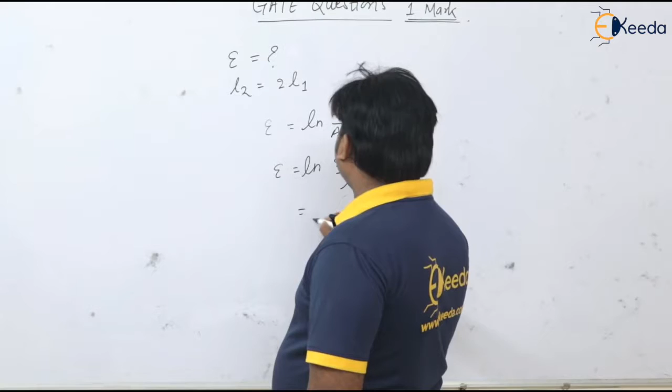True strain equals ln of final length over original length. Since the length is doubled, final length will be 2 times L original divided by L original. So ln of 2 is how much? That is the answer: ln of 2 is 0.693. So this is the true strain.

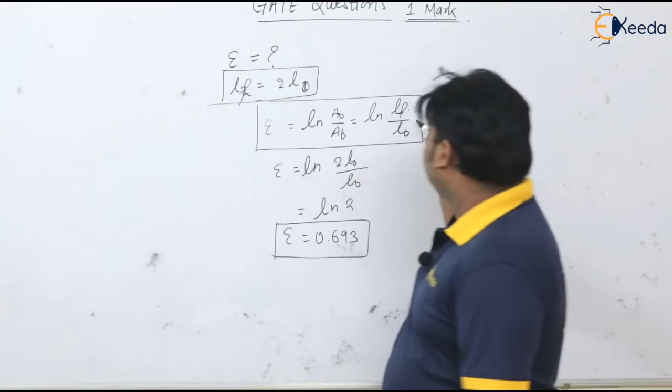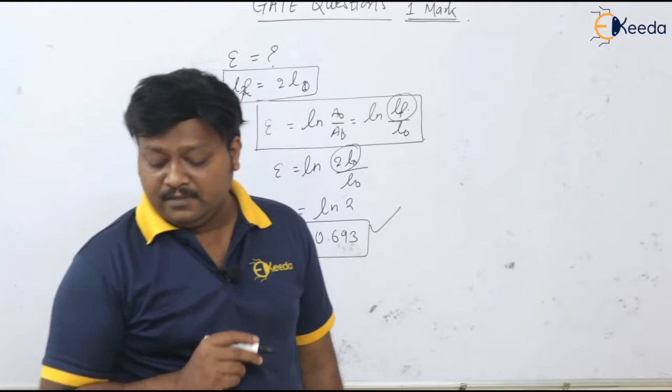We know true strain is the natural log of original area divided by final area, or natural log of final length divided by original length. Here L final becomes 2 times L original. Putting these values, we get the answer 0.693. The options given are 0.307, 0.5, 0.693 and 1. So 0.693 is the correct option.

Next question: hot rolling of mild steel is carried out. Option A, at the recrystallization temperature; between 100 and 150 degrees centigrade; below recrystallization temperature; or above recrystallization temperature. Of course, the word hot rolling, that is hot working, means we are working the material above its recrystallization temperature. So option D is correct: above the recrystallization temperature.

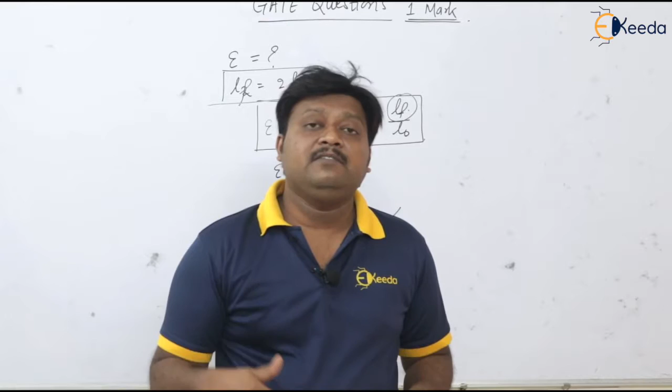Next: the ductility of the material with work hardening. Options: A increases, B decreases, C remains same, D unpredictable. We know that during work hardening, the material becomes hard and its strength increases. So when hardness increases, ductility comes down.

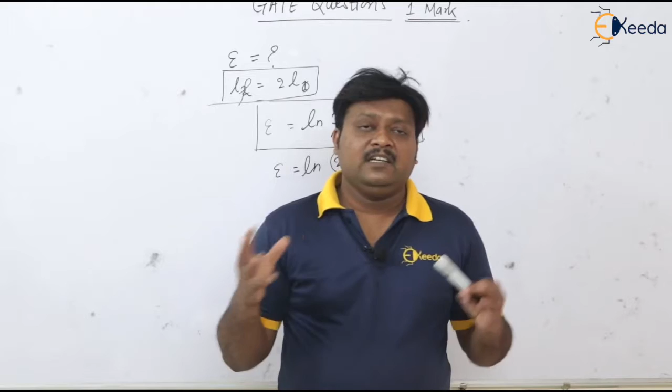When strain hardening occurs with increasing percentage of cold working on the material—since work hardening is observed only in cold working—as we increase the percentage of cold work, strength and hardness of the material go on increasing, while ductility comes down. So the ductility of the material with work hardening decreases. Option B is correct.

Next question: the cold working of steel is defined as what? Whenever we work the material below its recrystallization temperature, that is cold working. Options: A, at its recrystallization temperature; B, above its recrystallization temperature; C, below its recrystallization temperature; D, at 2/3 of the melting temperature of the metal.

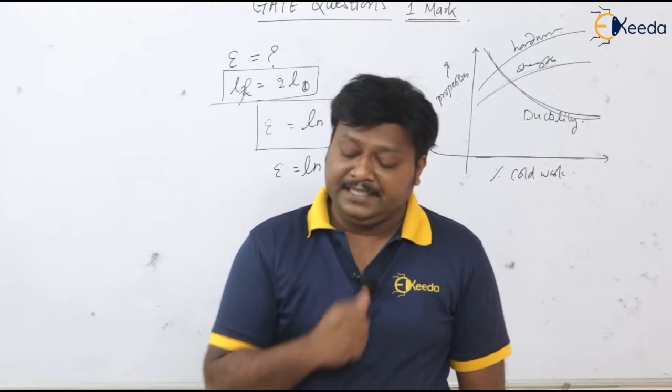In terms of formula, the recrystallization temperature is about 1/3 or half of the melting point temperature. Cold working of steel means the material is worked below its recrystallization temperature. So option C is correct here. I hope you are getting what I am saying.

Next question: the maximum possible draft in the cold rolling of the sheet increases with—so they are asking for the maximum possible draft in the rolling operation. We will see how to determine this maximum possible draft.

The maximum possible draft in cold working of sheet increases with what? We know that delta H max, the maximum possible draft, is equal to mu squared times the radius of roll. So how can we increase this? We can increase the coefficient of friction or the roller radius, and it goes on increasing.

Let us see the options. Option A, increase in coefficient of friction - yes, that is correct. Option B, decrease in coefficient of friction - no, if you decrease it, the draft will also decrease. So that is not correct.

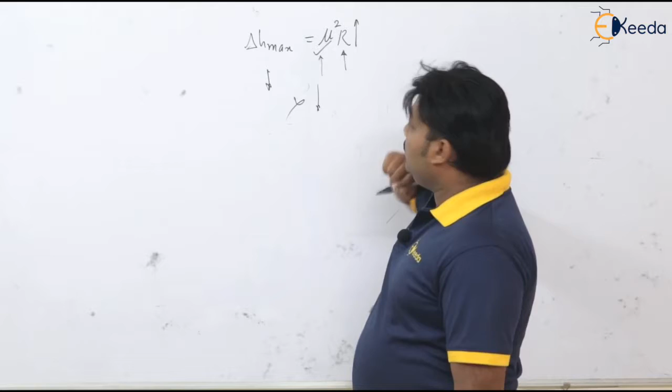Option C, decrease in roll radius - no, it increases with increasing roll radius, so option C is also not correct. And increase in roll velocity is independent, as you can see here. So option A is correct: the maximum possible reduction or draft in sheet rolling operation can be increased by increasing the coefficient of friction.

Next question: collapsible tubes are made by option A, drawing; option B, spinning; option C, extrusion; or option D, rolling. In drawing operation we are making wires from the solid rod, and there is no mandrel generally used for producing collapsible tubes.

Spinning is simply holding the given sheet onto the spinning block - that shape is going to come onto the sheet. We keep this sheet against the spinning block, that is the spinning operation we know. So there are no chances of getting a collapsible tube from this.

Extrusion - yes, by using the impact extrusion technique we get seamless or collapsible tubes. For rolling, if there is tube piercing or tube rolling, we can get the seamless tube, but the name of that process is tube piercing. After getting the seamless tube by tube piercing, we again send it to plug milling to get exact sizing of the produced tube.

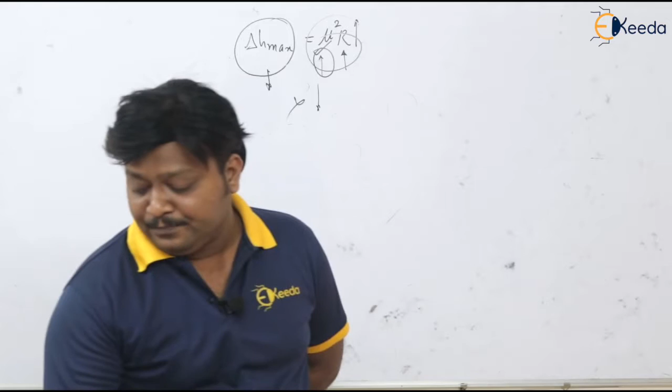Now the next question, dear students. I hope you are getting this. These are previous years production and mechanical engineering questions. We have discussed all the things in much detail or required detail, so no need to worry.

So the next question is from PI paper. Which one of the following manufacturing processes requires the provision of gutters?

Already discussed - when we are doing the closed die forging operation, to ensure material reaches each and every die corner, for that reason we take the volume of raw material more than the volume of the final product, up to 10 to 15% more volume.

And where to accommodate the extra material into the die? For that reason, we have provided gutters in the die, so material flows to each and every corner, and leftover material accommodates into the gutters and comes out as flash with the main product, which we remove by trimming operation. So I hope you get the answer.

What will be the answer to this? Which one of the following manufacturing processes requires the provision of gutters? Option A, closed die forging. Option B, centrifugal casting. Option C, investment casting. And option D, impact extrusion.

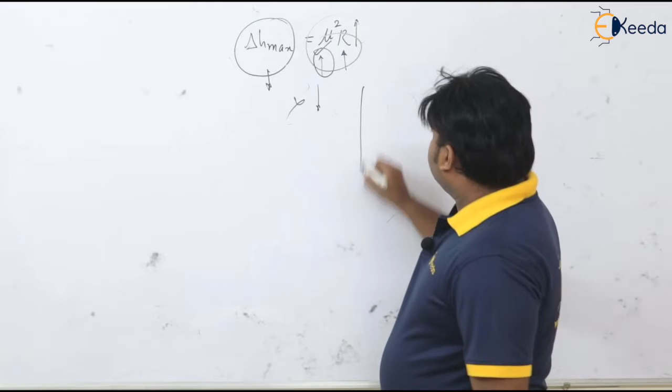Suppose this is a die and we are forging, and the material is not going properly at these corners. So after going at the corner, they are overlapping, having some fold like this at the corner. So they remain with a cavity or some crack - this folding over the part, some weak joint, or some folding we can have on the forged part. That is nothing but the lap.

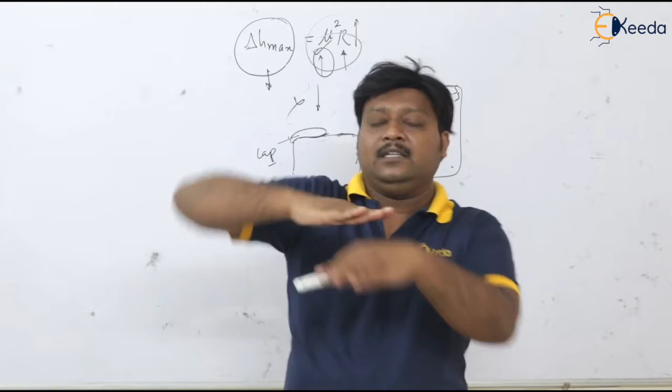Please remember this. Generally cold shut is simply the cracks at the corners, because of very sharp or very small corner radii, or because of improper design - that is the result, this is a cold shut. But sometimes material cannot flow into the die properly, so it gets overlapped on the remaining forged part, producing the lap-like structure, a weak joint structure. So this is called the lap in forging.

So here it is written in bracket lap, cold shut, and what is written here - cold shut in bracket lap. So of course this is not the defect in casting, but this is the defect in forging.

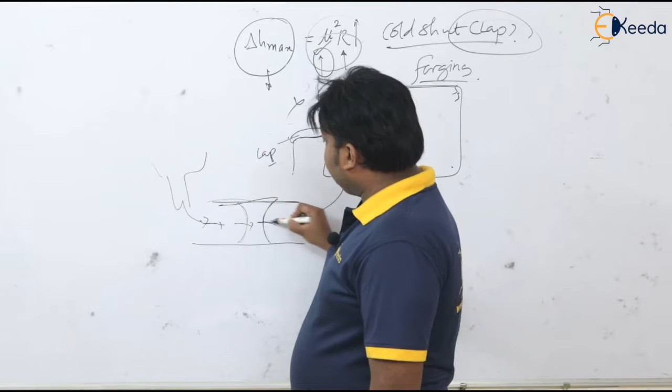In casting, what happens - the molten metal stream is coming from one place, and another molten metal stream is coming from another place. These two streams of molten metal are unable to fuse. This is the mold cavity - these two streams of hot material are not fused properly to become one material, so it produces this cavity. This is the cold shut.

So when they say lap, it is 110% the defect of forging. So what was the question?

Cold shut, in bracket lap, may occur in the products obtained by casting, forging, machining, welding. Machining and welding are not 100% it - so there is a doubt between casting and forging. I hope this doubt is now cleared. So forging is the correct answer.

Next question: Flash and gutters are provided in the drop forging dies at the following stages.

Flash and gutter are provided in the following stages: blocking, preforming (that is edgering), finishing, or fullering. The flash is only generated when the component is made, and at the last stage, that is the finishing stage, the flash is going to generate.

That is, the finishing operation is always carried out in the closed die forging operation. Please remember, we have discussed this. Fullering is an operation done onto the anvil using the top and bottom fuller.

Edgering also similar, we are collecting the materials at the ends of the given rod. And blocking is the approximate shape we are going to produce, but the final shape is always produced in the finishing operation.

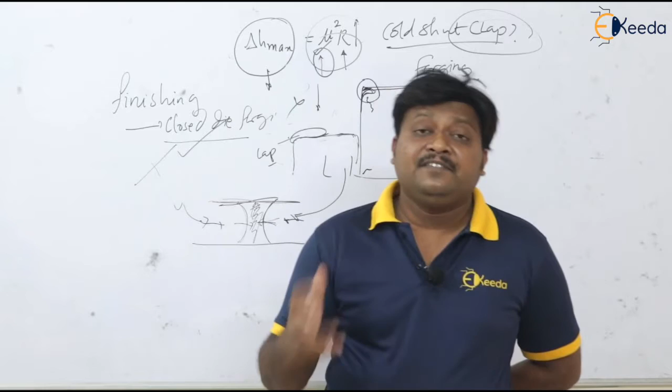So because of the scale formation, please remember what are the sources of defects in the rolling operation: inclusions, the scale formations onto the slabs that we have taken for the rolling operation. Please remember.

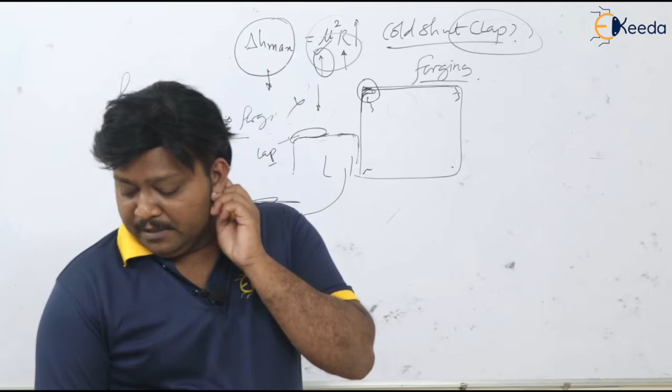Next question: a solid cylinder of diameter 100 mm and height 50 mm is forged between two frictionless flat dies to a height of 25 millimeter. Find the percentage change in the diameter. Okay, let us solve this.

What is the question? A solid cylinder of diameter 100 mm and height 50 mm, it is forged between two flat dies. These are two flat dies. Diameter was 100 mm and height was 50 mm.

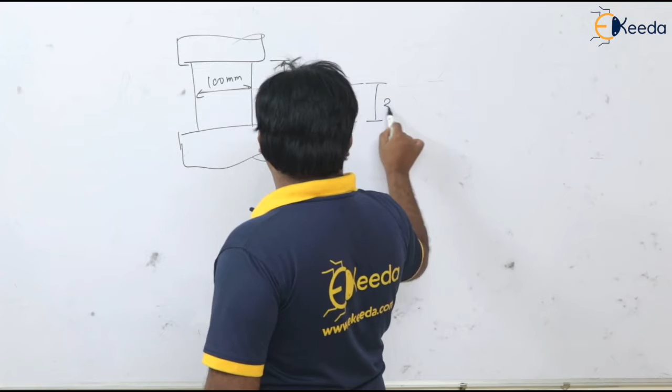Up to which height is it forged? The final height, it is forged up to 25 millimeter height. And what they are asking is percentage change in diameter. This is the final diameter, not given, we will calculate. So initial diameter 100 millimeter, final diameter not known, we will find out. Original height 50 mm and final height 25 millimeter.

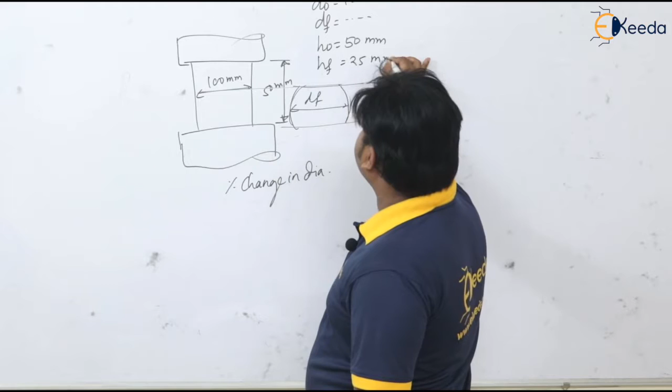We know that the volume constancy principle is valid for forging, so we can write d-original squared into H-original equals d-final squared into H-final. So D-final will be d-original into root of H-original by H-final. D-original was 100 into root of H-original 50 by H-final 25, so 100 root 2 millimeter is the final diameter, isn't it?

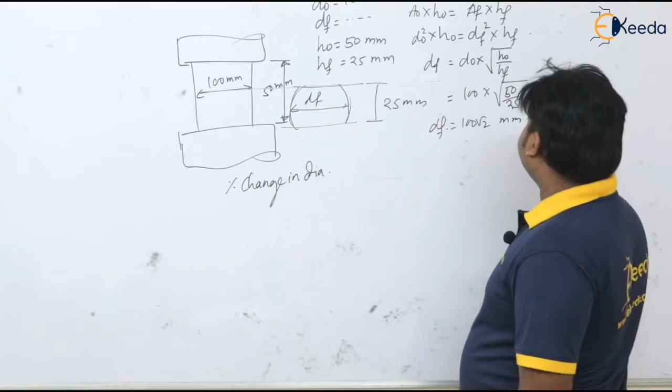So let us have the value here. How much is 100 into root 2? It is 141.42 millimeter. Okay, so what is the percentage change? Options are 0, 2.07, 20.7 and 41.4.

So very easily we can say 100 mm became how much? 141.42. So how much change have we got in the diameter? It is 41.4%, very nicely. So if this is the final, D-original was 100, D-final is 141.42. So what is the percentage change?

That is D-final minus D-original divided by D-original, isn't it? That is 141.42 minus 100 divided by original 100 into 100. So how much? It is 41.42%. So percentage change we got here is 41.4%.

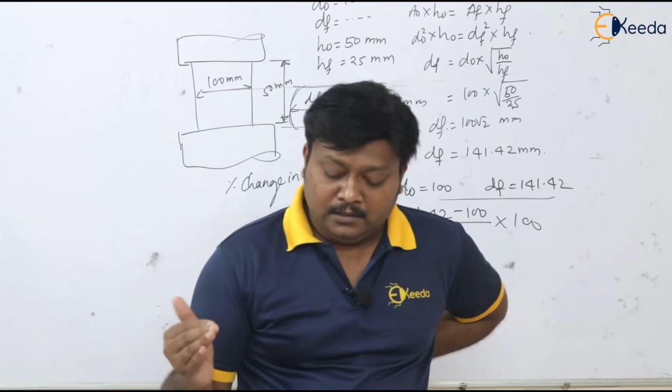Next question that we are going to see here: in group A, some defects and some products are given, and in group B, the name of the defect and other things are given. Let me write the match the pair here so that we can solve it very nicely. So group A, what is given?

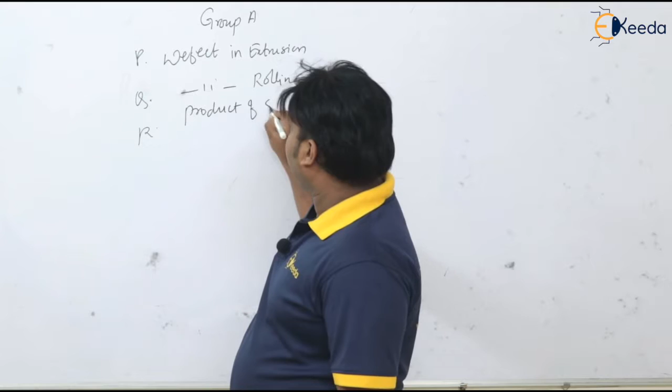So, defect in extrusion is P. Q is defect in rolling. R is product of skew rolling, and S is cluster mill, product of rolling through cluster mill.

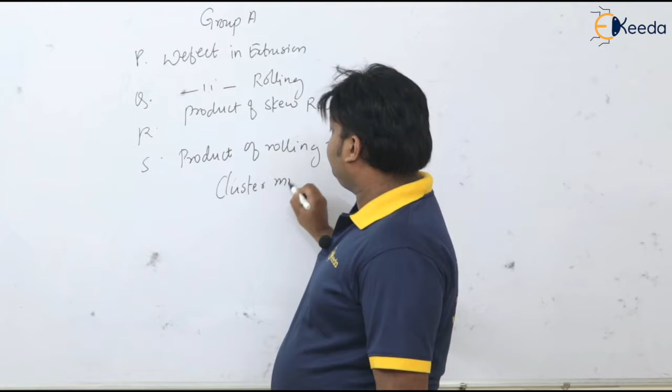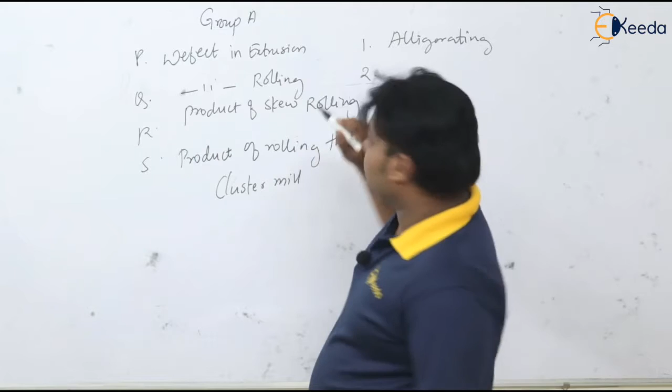So here, number one is given as alligatoring, second is scab, third is seamless tube, fourth is thin sheet with tight tolerance, and fifth is the semi-finished ball.

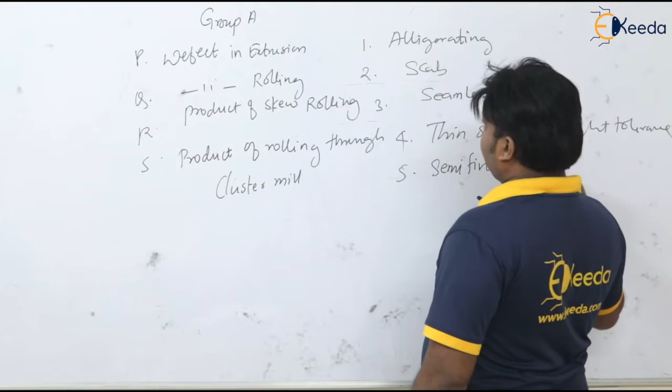Of ball bearing. Okay.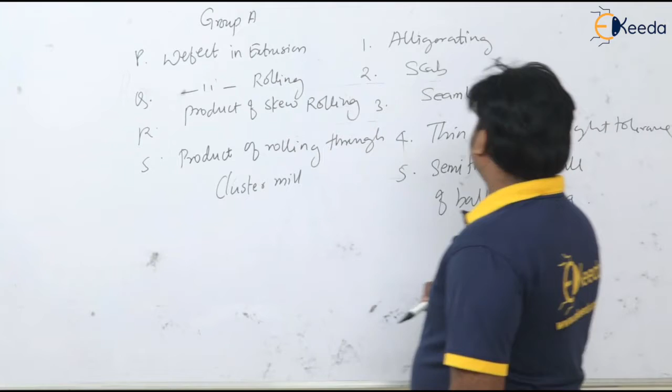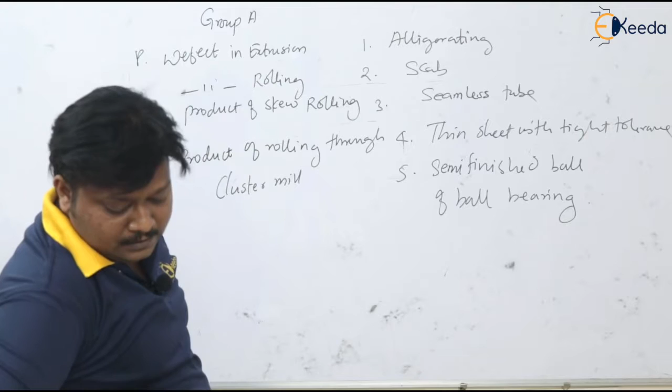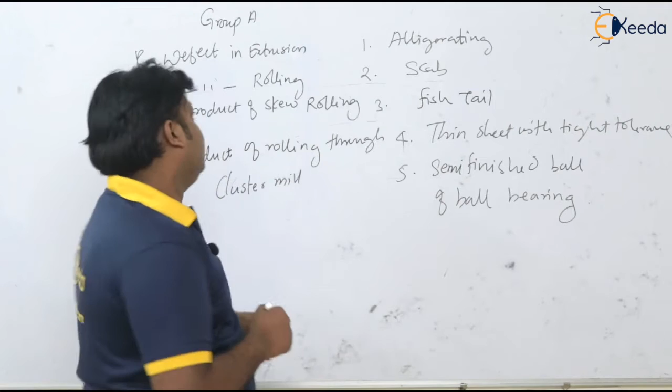So see here, what is given? Defect in extrusion, defect in rolling. So third is not seamless, it is a fish tail. So we know that the defect in extrusion we discussed is fish tail. Defect in extrusion is P3. We know the defect in rolling, that is crocodile crack or alligatoring, that is Q2.

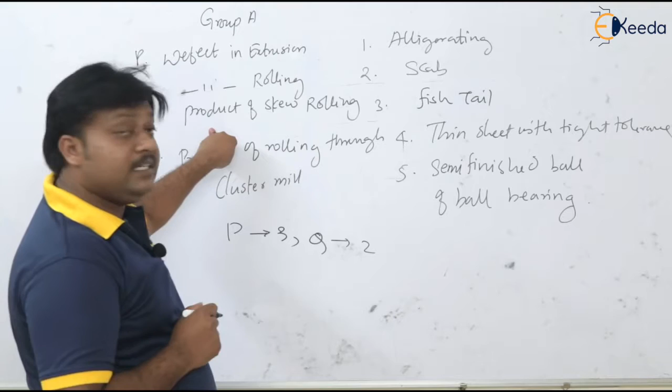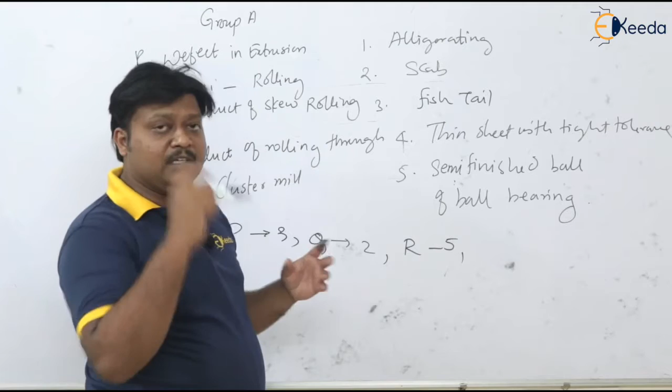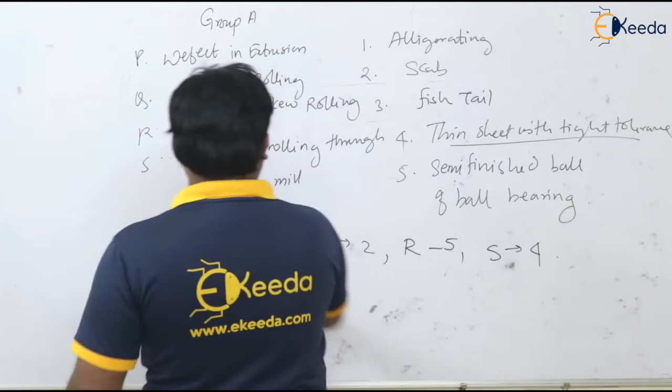We know the product of skew rolling is what? We have seen in the special rolling process that skew rolling is used for making large size balls, semi-finished balls, which are usually in large size ball bearings used in the cement industries. So the product of skewed rolling is R5. And in cluster mills, more than one backup rolls are used to have thin sheets with tight tolerances, so this is S4. This is the correct match we can have here. We have discussed it, it's very simple.

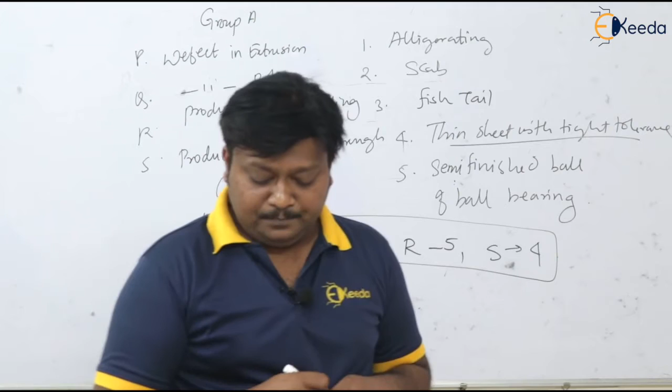And the last question we are going to see is a 1 mark question, again very simple. I hope you can solve this. In rolling process, the maximum possible draft, defined as the difference between the initial and final thickness of the sheet metal, mainly depends on which pair of the following parameters.

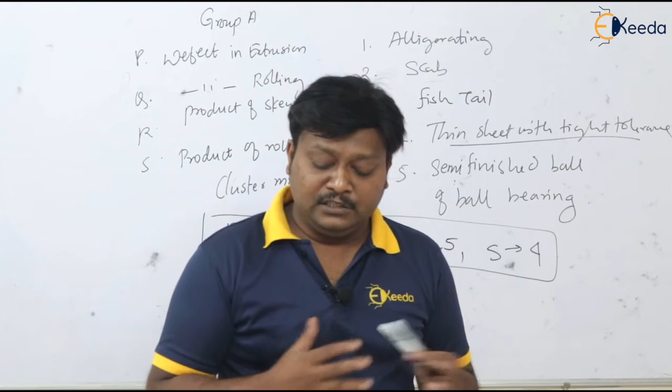So P, Q, R, S, T are the things given. P is given as strain, Q is given as strength of the work material, R is given as the roll diameter, S is given as roll velocity, and T is given as coefficient of friction between the roll and the work.

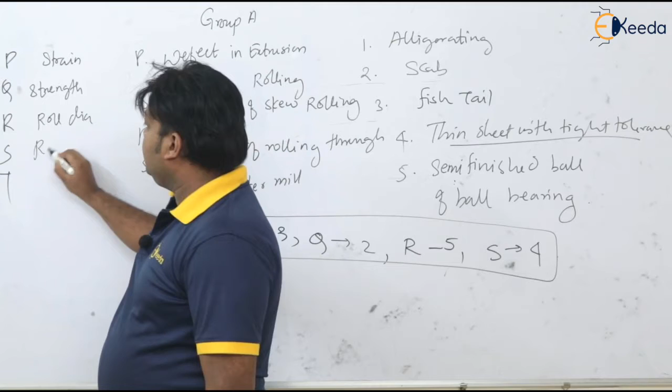Okay, so which parameters are given? P, Q, R, S, T. What all is given? Strain is given, then strength of work material is given, then roll diameter given, then roll velocity is given, and finally the coefficient of friction between the roll and the work is given.

So we know that delta H max is mu square times R, where mu is the coefficient of friction and R is the roller radius, which can be diameter by 2. So the pair is correct — roll diameter is correct and the coefficient of friction is correct. So what is the answer? R and T. The options given are Q,S, R,T, S,T and P,R. So RT is correct — roller diameter and coefficient of friction. From this formula it is very clear.

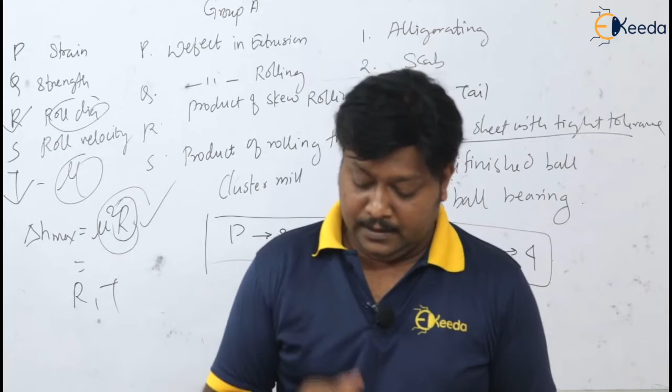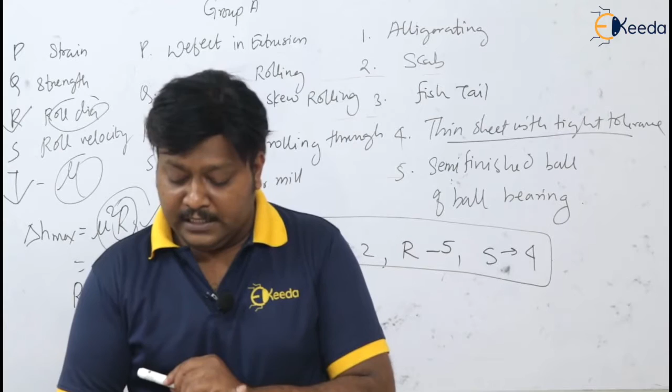Okay, next question we are having in this 1 mark question. See, the true stress at fracture of a tensile tested specimen having an initial diameter of 13 millimeter is 700 megapascal.

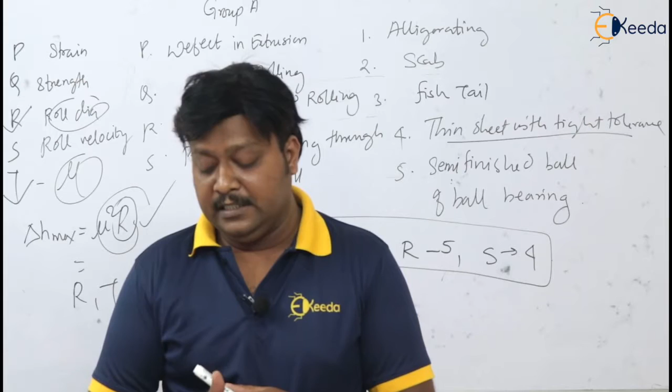If the diameter of the specimen at fracture is 10 millimeter, then the engineering stress in megapascal at the fracture is. I hope you are getting the question. I will repeat the question. What is the question? Once again I am reading.

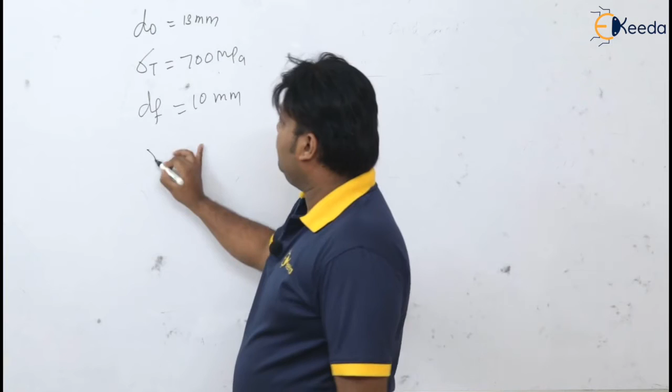The true stress at fracture of a tensile tested specimen having an initial diameter D-original of 13 millimeter, and the true stress sigma-T is given as 700 megapascal. If the diameter of the specimen at fracture, D-final or D-instantaneous at fracture, is 10 mm, then what they are asking is the engineering stress, that is sigma-n or nominal stress.

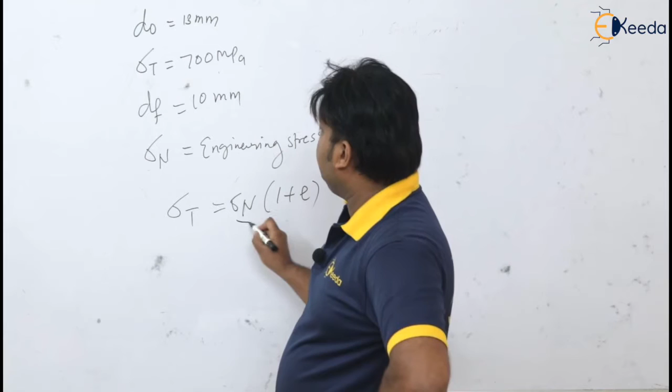So you know what sigma-T is — we have seen from the relation between true stress and engineering stress, that sigma-T is equal to sigma-n into bracket 1 plus E, isn't it? So sigma-T is known to you, only the thing is that E is not with you, that is the normal strain is not with you.

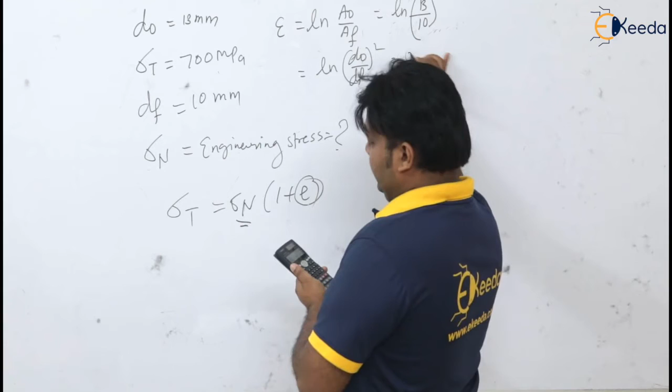So let us calculate. We are having the true strain. How to calculate true strain? That is ln of A-original by A-final, isn't it? So here ln of D-original by D-final, bracket square, because area is pi by 4 D-square. So it can be ln of original diameter 13 millimeter, final diameter 10, whole square. So ln of 1.3, or 2 times ln of 1.3, that is 0.524.

0.524 — this is your true strain, okay. And we know how to calculate this normal strain, that epsilon is equal to ln of 1 plus E. We know the relation between true strain and normal strain, isn't it? So true strain is 0.524, equal to ln of 1 plus E.

So what I have to do? E to the power 0.524 minus 1, isn't it, is equal to E — that E is for exponential and this E is for strain, don't confuse. So shift — answer is 1.69. So 1.69 minus 1 is equal to E. So how much is it? 0.69. So you got here the strain, and you know the true stress given as 700 megapascal — put the values here.

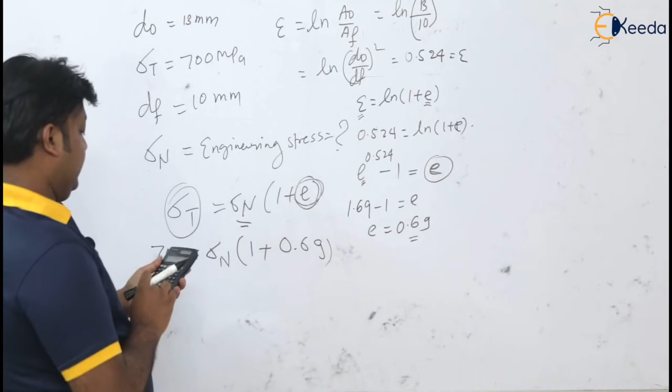So 700 is equal to sigma-n, which we are going to find out, into bracket 1 plus E, which is 0.69. So 700 divided by that answer, it is 414.2. So sigma-n is that much.

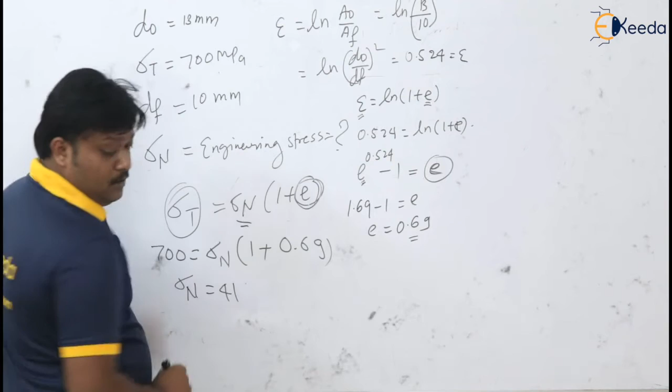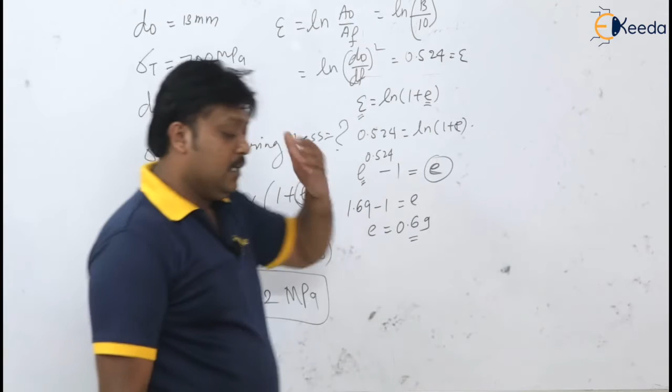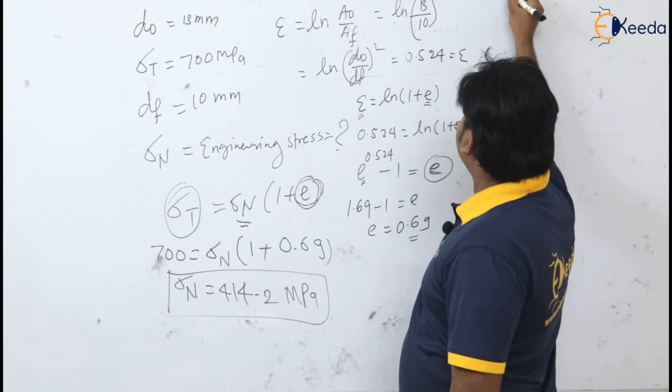So very easy, we know the relationship between normal stress and engineering stress, they are the same. But the relation between true stress and normal stress, that is engineering stress sigma n, is equal to sigma T is equal to sigma into bracket 1 plus E. And the relation between normal strain and true strain is epsilon, the true strain, is equal to ln of 1 plus E, which is the engineering or normal strain. This is the true strain. So by using this relationship we can easily calculate sigma n in this question.

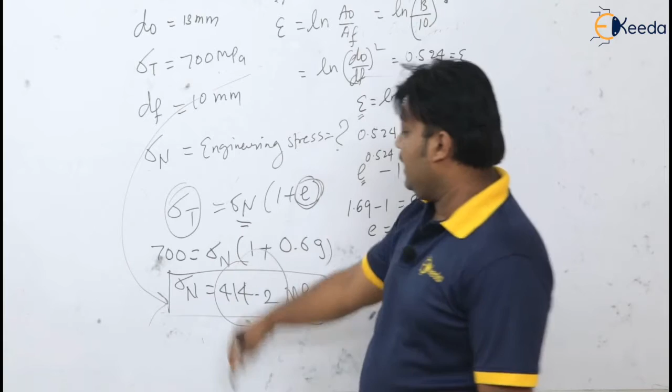So what answer did we get? 414.2 megapascal will be the engineering stress, okay. This question was from PI paper 2015. Here we have to write the answer, options are not given. So 414.2 is the correct answer, I think so.

And it is correct. So next question, listen carefully. Again from PI 2015, PI means Production Industrial Engineering, GATE paper 2015. I will read the question.

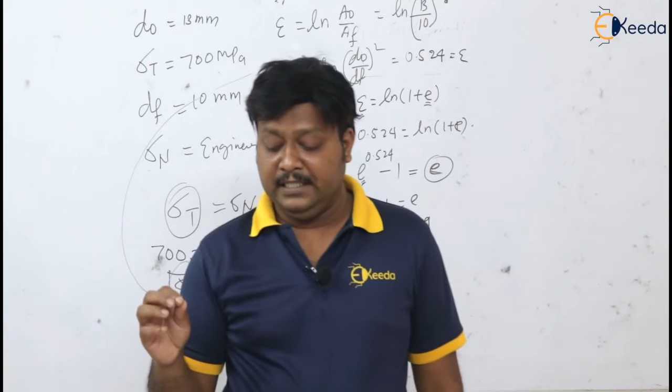In rolling of flat strip, what they are saying is about the relative velocity of the strip with respect to the roller. We know about the rolling operation, we have seen the relationship for linear velocities and for the pressure. Now they are asking for the relative velocity of the strip with respect to roller. The strip with respect to roller, we are going to see.

What are the options? Option A: positive at entry plane, negative at exit. Option B: negative at entry plane, positive at exit. Option C: positive throughout from entry to exit plane. Option D: negative throughout from entry to exit plane.

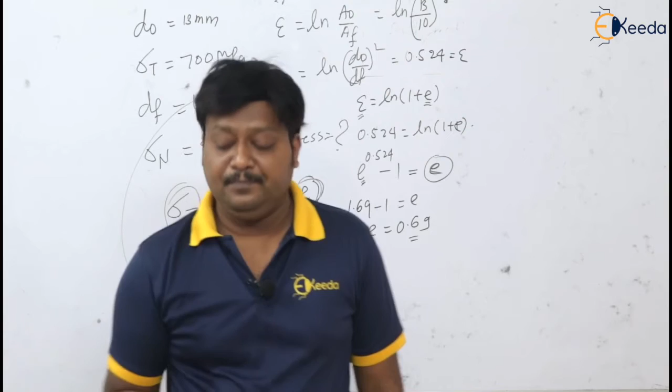We already discussed this, but once again I am going to discuss the relative velocity in the rolling operation. The very important thing is that the velocity of strip at the entry is less than the velocity of roller, which is less than the velocity of strip at exit. We know this, this is the roller rotating with constant RPM.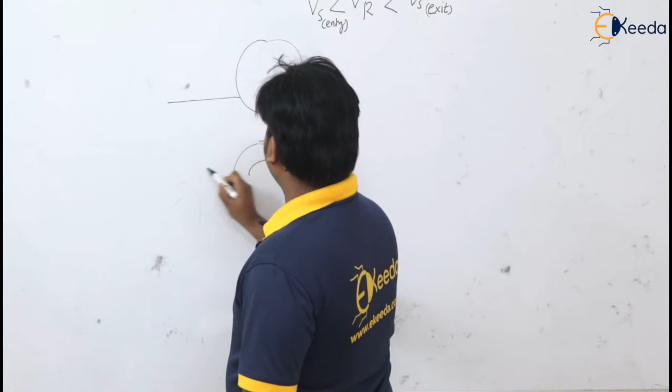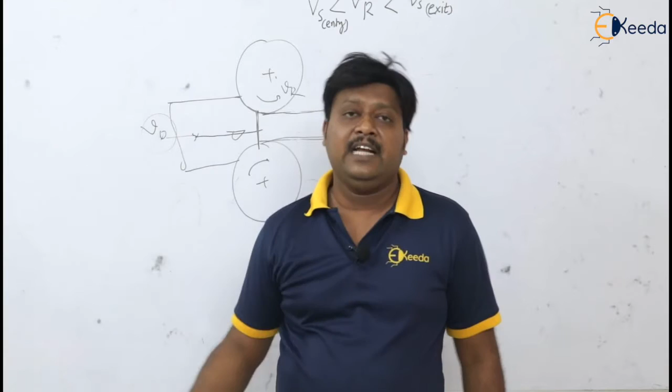Always this is the strip at exit and this is the strip at entry. So we know that the initial velocity of this strip, I am writing V original here, and this is V final, and say this is the velocity of roller VR. So what happens first: this strip velocity at the inlet is very less compared to the velocity of roller. Now once the strip moves into these rollers, the velocity goes on increasing, and at some point in the deformation zone it becomes equal to the velocity of roller, that we know is the neutral point, and after passing the neutral point the velocity of strip again goes on increasing and becomes maximum at the exit.

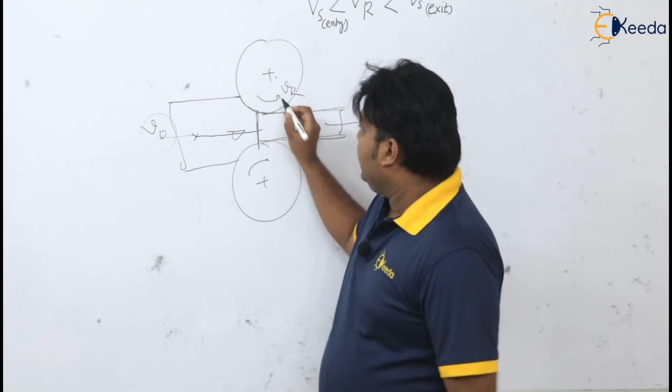But throughout this, the roller velocity remains the same. So we can say initially the roller velocity is greater than the strip velocity, and at the exit the roller velocity is less than the velocity of the plate, isn't it? So if I consider the roller velocity with respect to strip velocity at the entry plane, please remember, it will be a huge positive relative velocity.

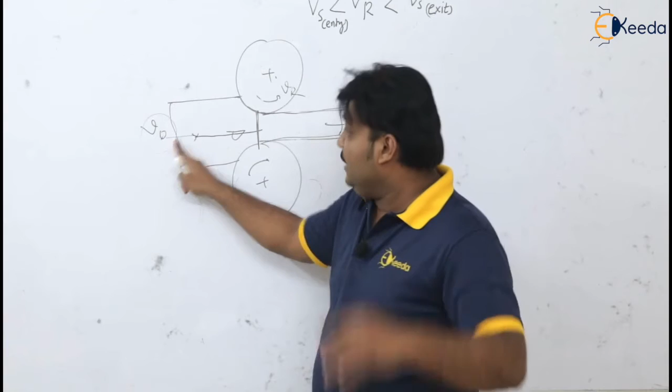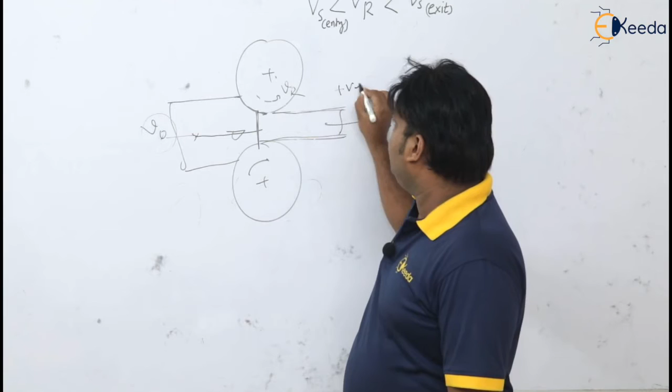But what the question is asking is the relative velocity of strip with respect to roller at the entry plane - what will it be? Much lesser, so definitely a huge amount of relative velocity, but negative, because roller velocity is more than the strip velocity. And at the exit, of course, roller velocity is much less than the strip velocity. So here it will be positive relative velocity, and here it will be negative relative velocity when taking the relative velocity of plate or sheet with respect to roller.

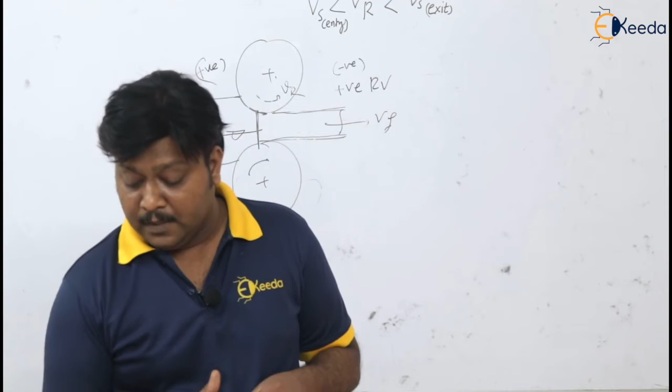Next question: the value of true strain produced in compressing a cylinder to half of its original length. Options are 0.69, minus 0.69, 0.5 and minus 0.5.

From the options, it is clear that compressive stress is applied. We assume positive sign for elongation and negative sign for compression. So here we are compressing the cylinder to half its original length. Say this is the cylinder with length L original. They are compressing it to length L final, which equals L original divided by 2, half of its value.

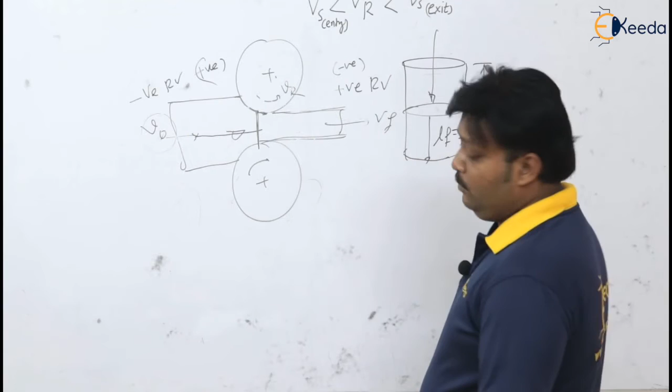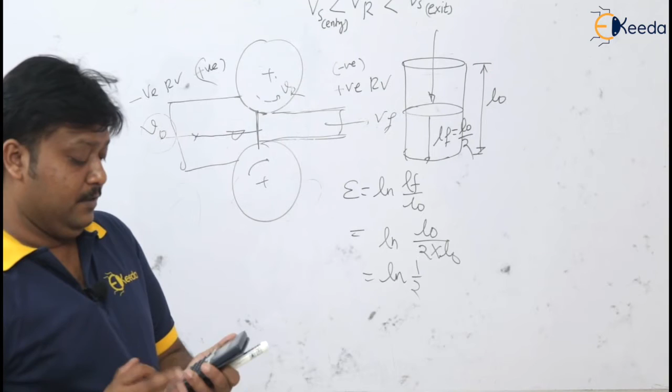So the true strain they are asking, what is true strain? It is ln of L final divided by L original. So ln of L final is L original divided by 2 into L original, so ln of half, that is ln of 0.5. How much is ln of 0.5? It is minus 0.693.

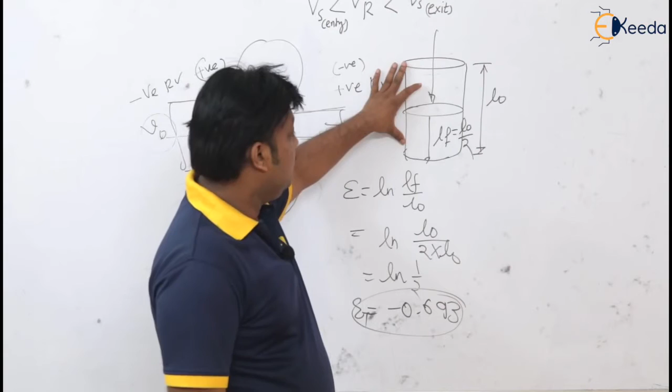So this is the correct answer. This is the true strain induced in the cylinder when compressed from its original length to half its length. So minus 0.693 is the correct answer, option B is correct, minus 0.69 as given.

Okay, so any question remaining? So again, see here.

This is a PI 2018 question: which one of the following defects is not associated with the casting process? So option A, hot tear - yes, hot tear occurs in casting.

Porosity occurs in casting. Blister, yes, occurs in casting. Blister is the incomplete hole at the surface - it is a scar covered with a very thin layer of material over it. So a blowhole onto the surface just covered with a thin layer of material, that is the blister.

It is a casting defect. And option D is center burst. Yes, very easy - center burst is found in extrusion. You can find it in the wire drawing process too. So what is center burst? As we discussed, it occurs whenever there are large deformation gradients along the cross section.

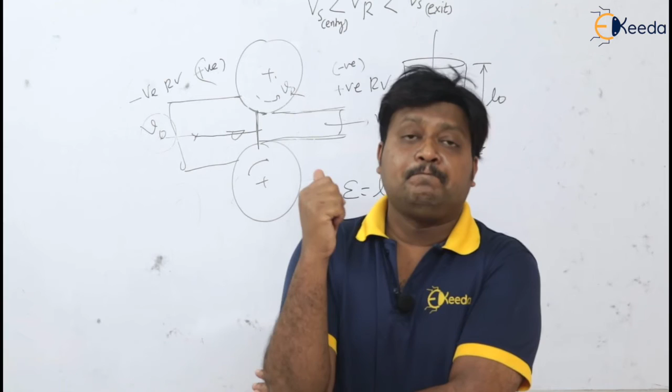Okay, next question: match the pair. I hope this is the last question I will discuss for this 1 mark practice session for the GATE questions. Product is given and manufacturing process is given.

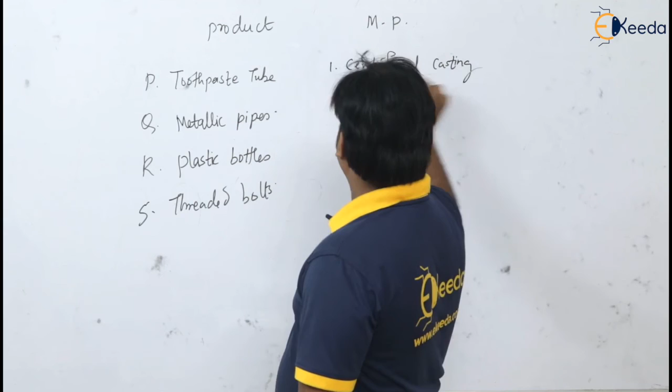So product P is toothpaste tube, Q is metallic pipes, R is plastic bottles, and then threaded bolts. The processes given are centrifugal casting, blow molding, rolling, and impact extrusion.

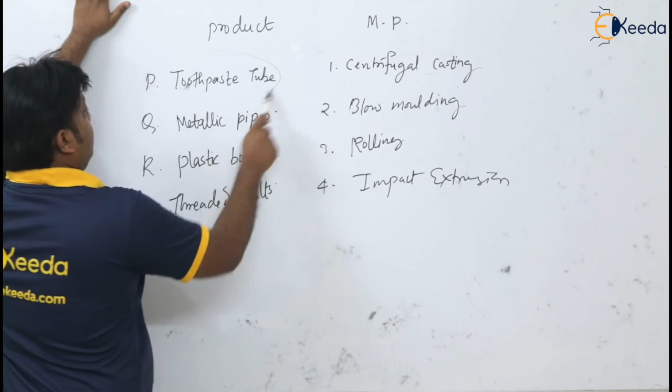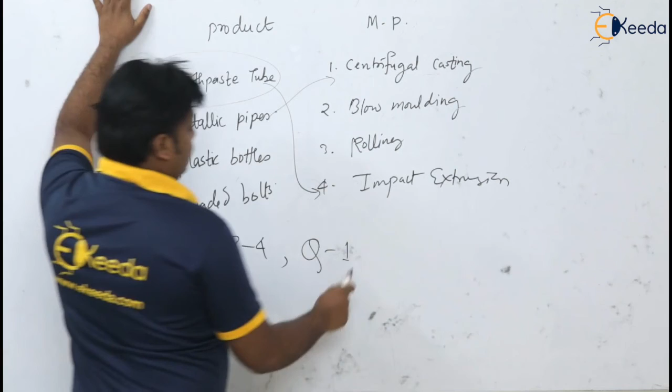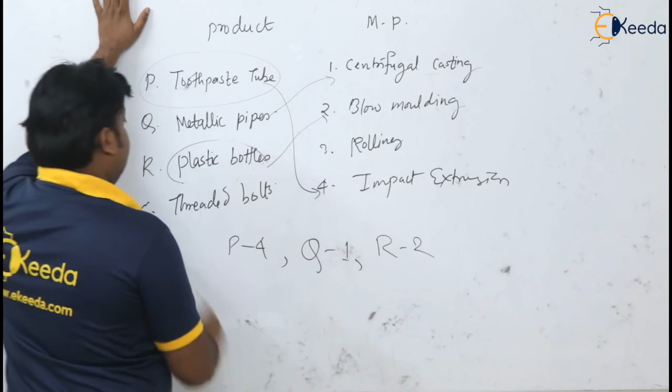I hope you got the answer. So we know that toothpaste tubes are manufactured by impact extrusion, that is seamless or collapsible tubes. So P4, metallic pipes use centrifugal casting, Q1. Plastic bottles use blow molding technique, R2. And threaded bolts use thread rolling process, S3, which is used for making threads on screws or bolts in mass production.

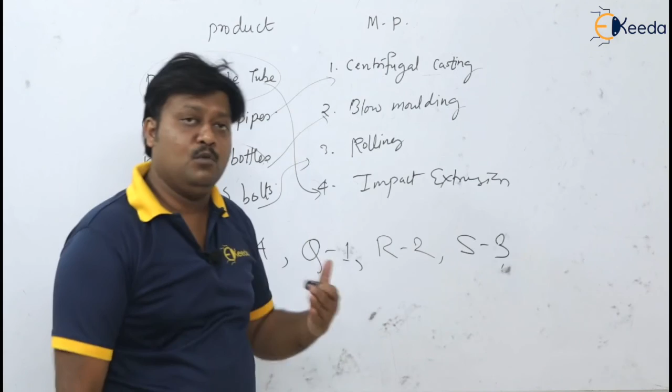Please remember this. So this is the correct match the pair, and here we will stop. I hope you get the idea about how they ask 1 mark questions in the GATE examination on the topic of metal forming. Practice it, very easy. Thank you.